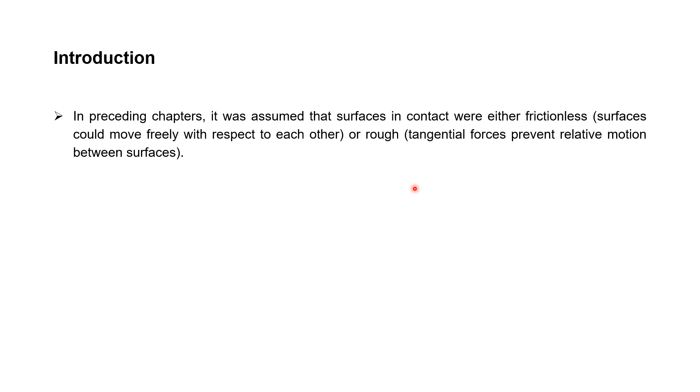So what is friction? Friction is our resisting force, the force that resists our motion. For example, if there were no friction while we are playing billiards, once the cue ball hits the other balls, our cue ball will not stop no matter what happens. Our movement just continues. Actually, there is no perfectly frictionless surface that exists.

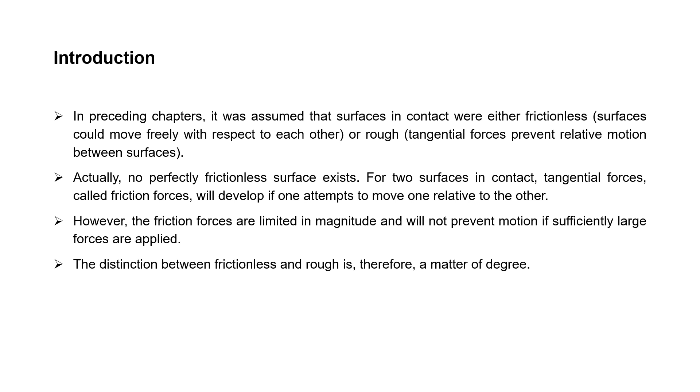For two surfaces in contact, tangential forces called friction forces will develop if one attempts to move one relative to the other. However, the friction forces are limited in magnitude and will not prevent motion if sufficiently large forces are applied. The distinction between frictionless and rough is therefore a matter of degree. There are two types of friction, dry or Coulomb friction and fluid friction. Fluid friction applies to lubricated mechanisms. Our discussion is limited to dry friction, which means non-lubricated surfaces.

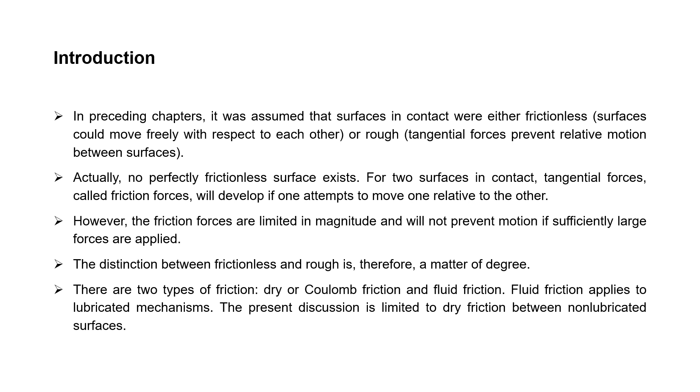Friction is defined as the contact resistance exerted by one body upon a second body when the second body moves or tends to move past the first body. Friction is the retarding force always acting opposite to the motion or tendency to move. For example, if we have a force moving towards the right, the friction force will act to the left, since it is always in the opposite direction of our applied force.

The frictional force, denoted by F sub f, is equal to mu times N. The mu varies, since it can be mu s or mu k, depending on which friction we are talking about. Mu is our coefficient of friction and N is our normal force. Always remember that the normal force is always perpendicular to the line of action.

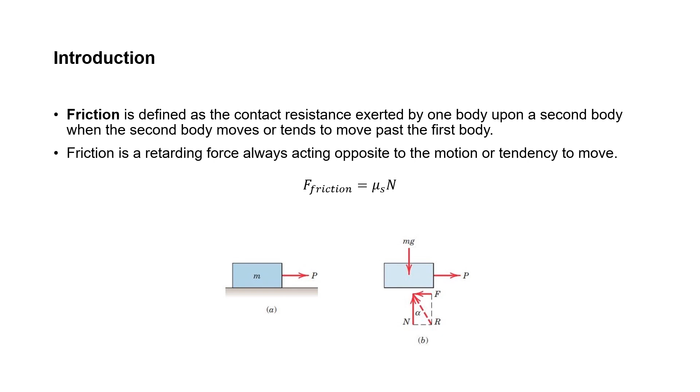Types of friction. As mentioned earlier, we have dry friction. Dry friction occurs when unlubricated surfaces of two solids are in contact under a condition of sliding or tendency to slide. A friction force tangent to the surface of contact occurs both during the interval leading up to impending slippage and while slippage takes place. The direction of this friction force always opposes the motion or impending motion. This type of friction is also called Coulomb friction.

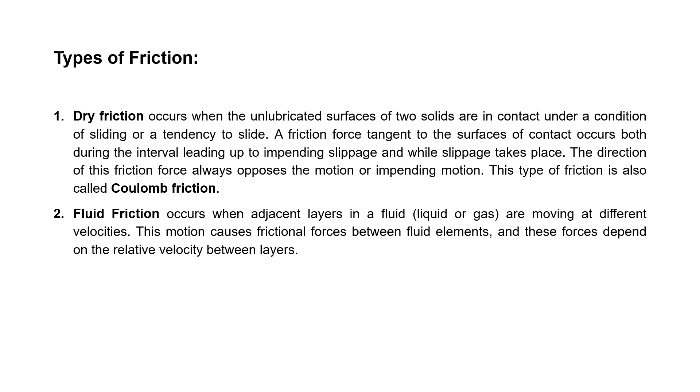Next we have what is called fluid friction. Fluid friction occurs when the adjacent layers of liquid or gas are moving at different velocities. Lastly is internal friction. It occurs in all solid materials which are subjected to cyclical loading. For highly elastic material, the recovery from the deformation occurs with very little loss of energy due to internal friction.

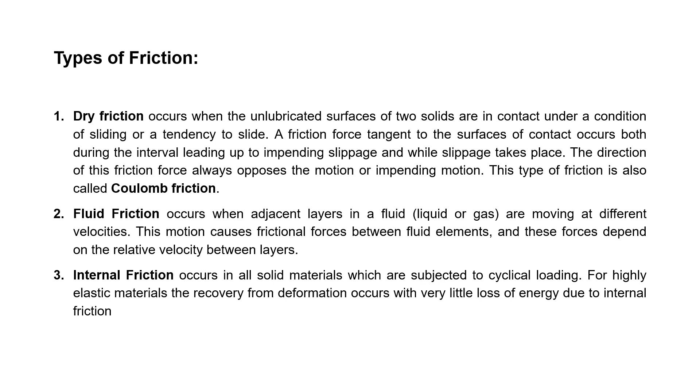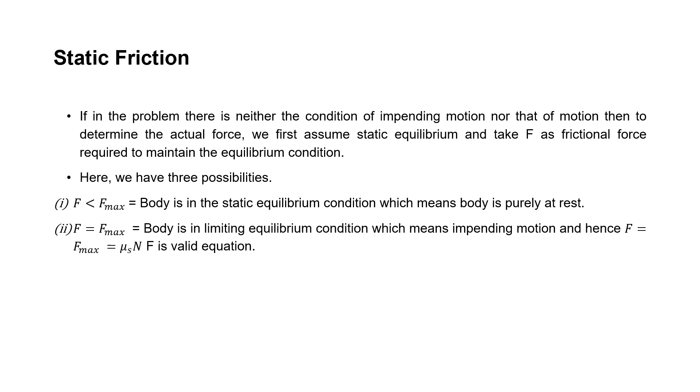For static friction, we have three cases to consider. First, the frictional force is less than the maximum force allowed. This means the body is in static equilibrium, which means the body is purely at rest. Then if the frictional force is equal to the maximum force, the body is in a limiting equilibrium condition, which means impending motion, or the motion is just about to start. The formula for the maximum force is valid: mu, the coefficient of static friction, times the normal force. Then if the force is greater than the maximum force, the body is in motion.

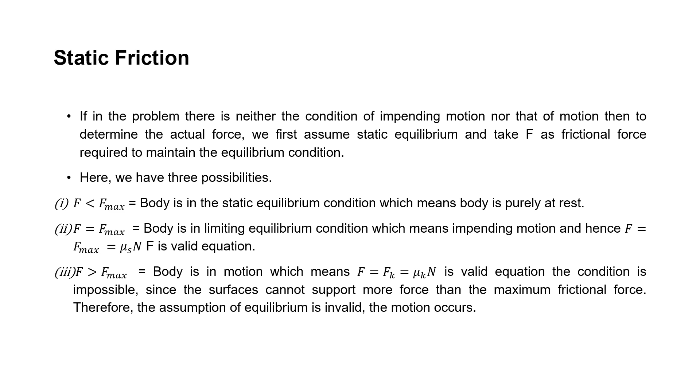Which means F is equal to the dynamic coefficient of friction multiplied by the normal force. For limiting friction, the condition of impending motion is known to exist. Impending motion means the motion or movement is just starting. Here, a body in equilibrium is on the verge of slipping, which means the body is in a limiting equilibrium condition. It is the maximum value of friction force that the surface can exert on the block and is designated by F max.

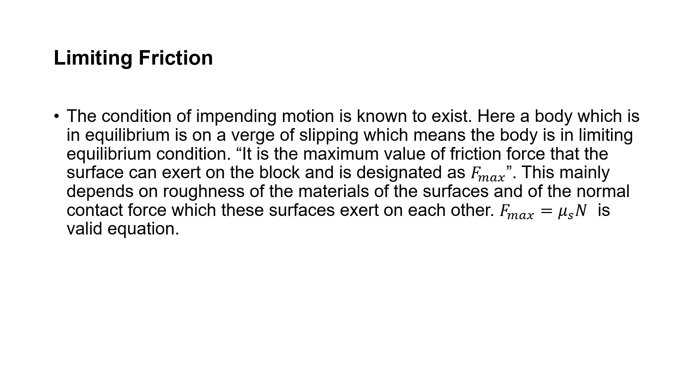The formula for F max is the product of the normal force and the coefficient of static friction. For kinetic friction, the condition of a relative motion is known to exist between the contacting surfaces.

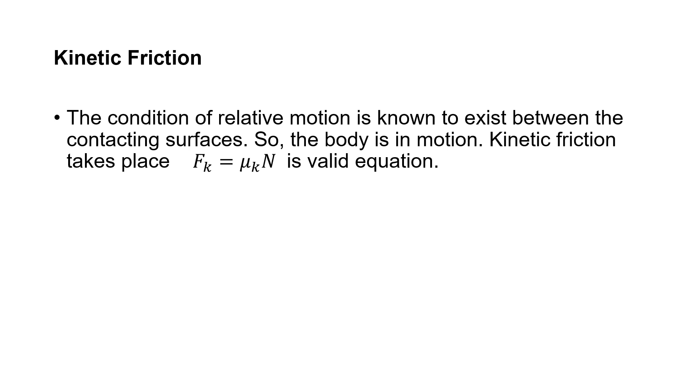So the body is in motion. So when kinetic friction is taking place, the kinetic frictional force is equal to the dynamic coefficient, or the kinetic coefficient of friction, multiplied by N. It is a valid equation.

Laws of dry friction. Again, the discussion for this topic is limited to dry friction. So the dry friction laws are exemplified by the experiment below. As shown in the picture, a weight block W is positioned on the horizontal plane surface. The forces acting on the block are its weight W and the surface reaction.

Since we have no other horizontal component present here, there is no motion, because the tendency of the normal force is always to resist the weight that we apply.

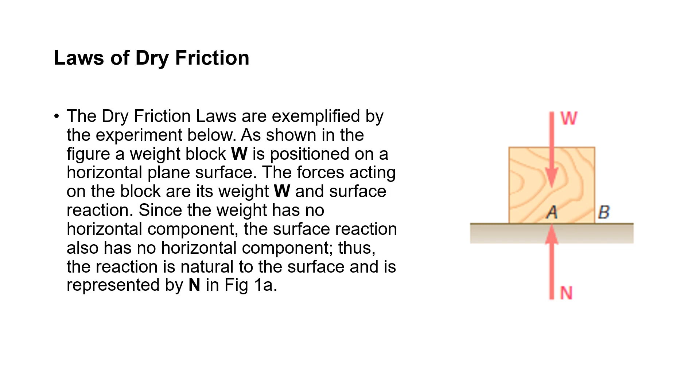Next, we are given a block with a load or weight of W. The normal force is present here. Then we have a force pushing the block towards the right. As mentioned earlier, the frictional force is there to resist our motion. If our force P tends to move the block to the right, therefore the frictional force direction is going to the left.

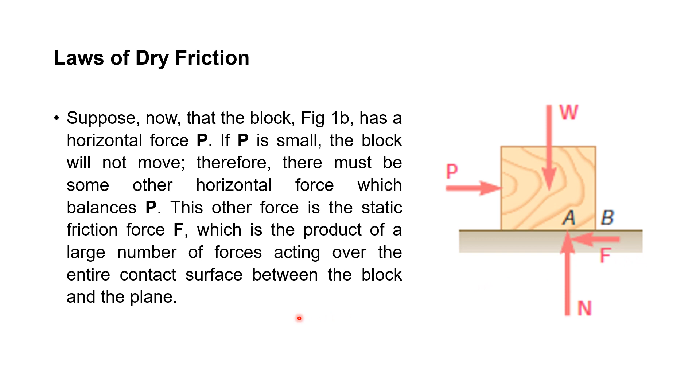Then it says here that experimental evidence shows that the static friction force maximum value F sub S is proportional to the normal force N of the surface reaction, where mu s is the coefficient of static friction. For the magnitude of the kinetic frictional force, the formula uses the coefficient of kinetic friction. Mu sub s and mu sub k friction coefficients are not dependent on the area of the contact surface. If the coefficient of static friction is not given in the problem, we can solve it using the data that we have.

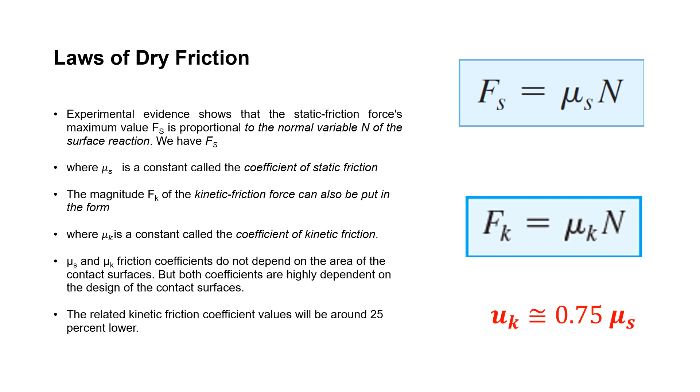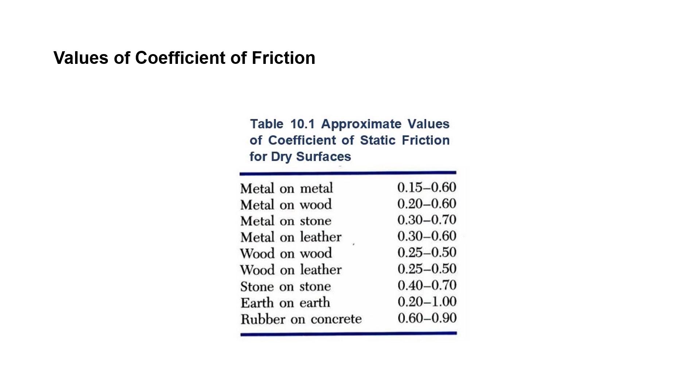The coefficient for kinetic friction is commonly known to be approximately equal to 0.75 of the coefficient of static friction. Now, what is flashed on your screen is the coefficient of static friction for dry surfaces. Here the common static friction range is present. Again, if the coefficient of friction is not given in the problem, we can get it by solving or analyzing the parameters given in the problem.

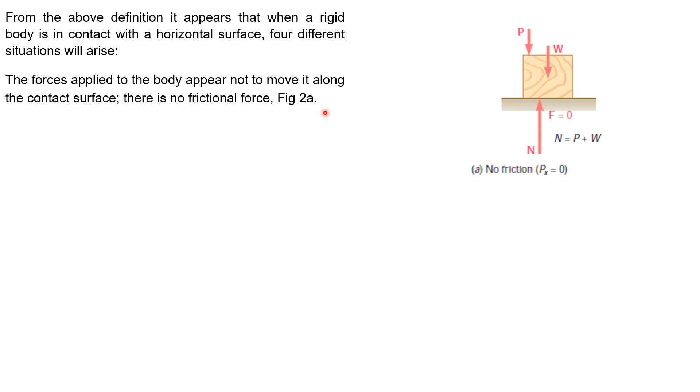From there, based on our definition of friction earlier, we have four different situations. First, the force applied to the body appears not to move it along the contact surface. In this first example, we are given a block with weight W. The force P is placed in the same direction as the normal force, so there is no frictional force present here. The normal force can be solved as the sum of our applied force and the weight. Next, our force is applied at an angle.

It says here, the forces applied tend to move the body along the contact surface but are not strong enough to set it in motion. So the friction force F that has evolved can be found by solving the body's equations of balance, since there is no proof that the force F has reached its maximum value. Then the equation F sub m equals mu times N cannot be used to calculate the force of friction, because we do not have enough details saying that there is motion here.

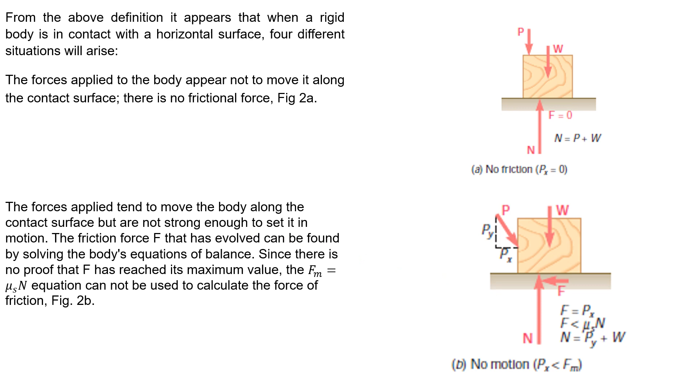Then to solve for the frictional force, we can use the summation of the x components. We add the x components here, wherein in this problem we have P sub x, or the x component of our force P. Then the force F that we get should be lower than the maximum frictional force, because there is no motion in our figure.

Next, if we are going to have motion, it says here the forces applied are such that the body is about to slip. We say here that there is an impending motion. The friction force F has reached its full value F sub m and balances the applied forces along the normal force N. You can use both the equilibrium equations and the equation F sub m equals mu s times N.

We also take note that the force of friction has a sense of opposition to the imminent motion. So for example, po dito sinabi na magkakaroon tayo ng motion. So therefore, yung frictional force sub m natin, again, is summation lang po yan nung forces along x. Then si frictional force naman po natin again is equal siya doon sa normal force multiplied by the coefficient of static friction. And yung normal force naman po natin is equal lang siya doon sa summation ng weight natin and y component nung force P natin.

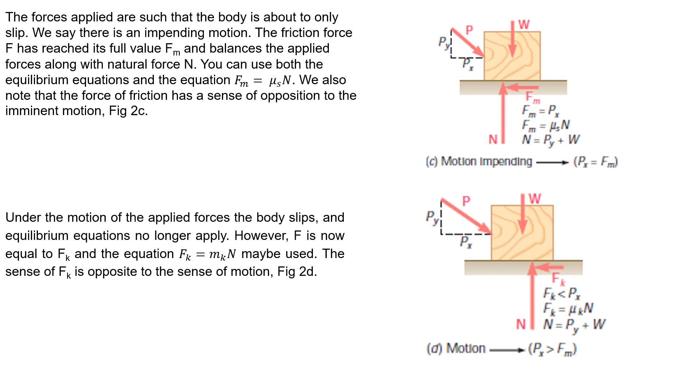Then last case po natin, under the motion of the applied forces, the body slips and equilibrium equation can no longer apply. However, F is now equal to the kinetic frictional force natin. And then, ang gagamitin na natin dito is yung equation natin for kinetic friction.

So next po, pwede natin kasing i-represent yung normal force natin and yung frictional force F natin using yung resultant force natin. So kung ganun po yung mangyayari dun sa ano natin, ito yung formula na pwede nating magamit. Kasi di ba? Again, if given ka ng vertical force and y component ng force natin, therefore, pwede natin siyang i-represent as a value of our resultant. If kung ganun po yung gagawin natin,

Para makuha yung angle po na yon, we will be simply using yung formula natin. So, tangent phi is equal to yung frictional force natin divided by the normal force. Pero yung frictional force natin can be represented as the coefficient of static friction multiplied by the normal force. So present si normal force sa numerator and denominator, so pwede silang i-cancel out. So therefore, tangent phi s is equals to the coefficient of static friction. Ganon din po yung case pagdating naman kay kinetic friction. Then we can simply solve for the angle using yung arctangent function natin.

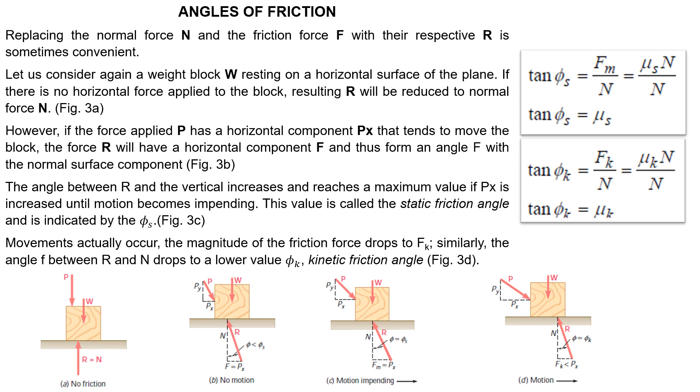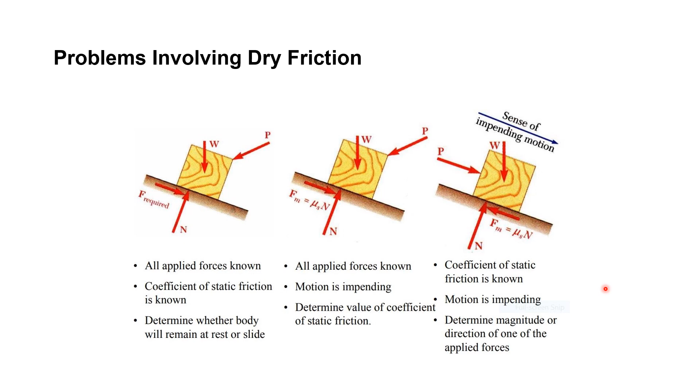So ito po yung mga possible problems na pwede natin ma-encounter pagdating kay dry friction. Una, all applied forces are known. Coefficient of static friction is known. Determine whether the body will remain at rest or slide. Yung other question naman, other case naman natin, lahat ng forces ay alam natin. And then yung motion natin is pasimula pa lang, pinapahanap yung coefficient ni dynamic friction or ni static friction. O kaya naman, coefficient of static friction is known. Pasimula yung motion natin. Pinapahanap yung magnitude or direction ng applied forces natin.

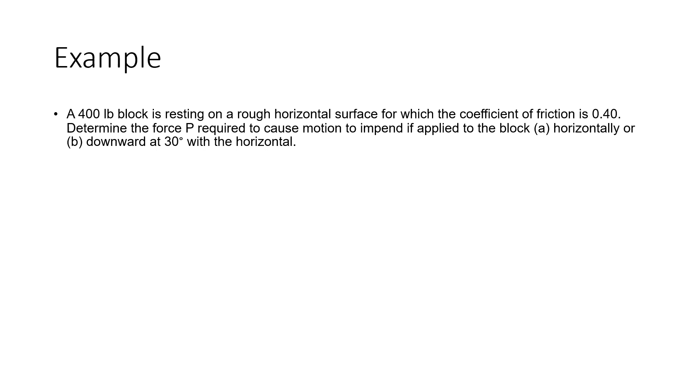Okay. So dito po, meron tayo example para ma-apply yung concept discussed earlier. So a 400-pound block is resting on a rough horizontal surface for which the coefficient of friction is 0.4. Determine the force P required to cause motion to impend if applied to the block A horizontally or B downward at 30 degrees with the horizontal. So, ito po yung given block natin. Then, ang pinapahanap po is yung value ng force P natin if horizontal ko siya i-apply. And P is equal to kung ano yung value ng P natin kapag downwards at 30 degrees with the horizontal.

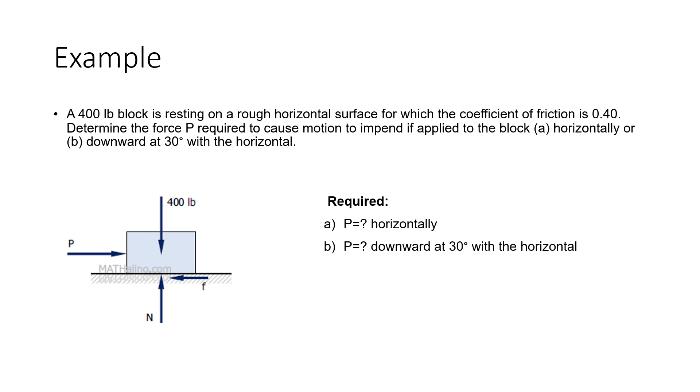First po, kailangan nating hanapin muna yung value ng normal force natin. Bakit? Kasi di ba, again, applicable pa naman dito si equation of equilibrium natin. Kaya lang alam natin na si frictional force F is equal to the coefficient of friction natin multiplied by the normal force. So mag-summation of forces vertical muna tayo. So summation of forces vertical is equal to 0. Normal force minus weight is equal to 0. Therefore, normal force is equal to 400 pounds.

Then next, the frictional force is equals to the coefficient of friction multiplied by the normal force. For this case is 0.4 times 400 pounds is equal to 160 pounds. So, summation of forces horizontal tayo equals to 0. So, ang present lang na parameter sa atin is force P and yung force F natin sa x-axis. So, therefore, we have P minus F is equals to 0. Therefore, yung P natin and frictional force natin is equal to 160 pounds.

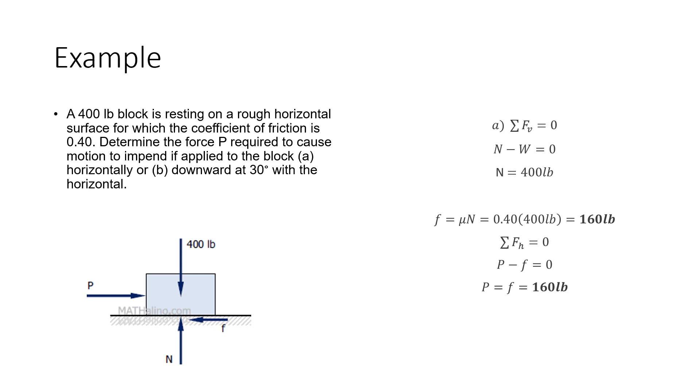So, next naman po, ang kaibahan, apply natin ngayon, or solve natin yung second case natin na mayroon po tayong in-apply na force P with an angle of 30 degrees with the horizontal. So, ngayon po, same method of solution yung gagawin natin. Ang kaibahan lang is madadagdagan lang yung ating mga horizontal and vertical components. So, first, una po natin gawin is summation of forces vertical. So, normal force is equals to 400 pounds plus P sine 30.

So, bakit P sine 30? Kasi yun yung vertical component nung force P natin. So, normal force is equals to 400 pounds plus P sine 30. Ngayon po, si force P, hindi natin siya alam yung value niya. Then, simplify lang po natin.

N is equal to 400 pounds plus 0.5 P. Ito yung tatawagin natin na equation 1, kasi kahit anong gawin natin, hindi na natin yan masisimplify pa. Next, isolve naman natin yung frictional force natin.

Alam natin na ang formula natin for frictional force is equal to mu, or the coefficient of friction, multiplied by the normal force. So we have 0.4 times 400 pounds plus 0.5 P. So yung frictional force po natin is equal to 160 pounds plus 0.2 P. Ito naman yung ating equation 2.

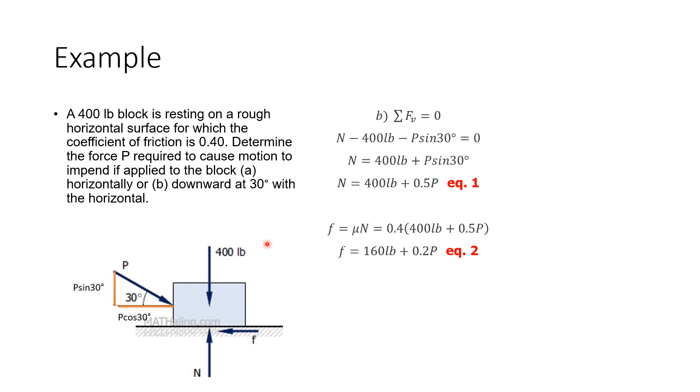Next is summation of forces, horizontal naman tayo. So again, ang horizontal component lang na meron tayo dito is yung frictional force F, and then yung x component naman ni force P. So since going to left si frictional force F, negative siya. Then plus the x component, since ito ay going right, kaya siya naging positive. So negative F plus P cosine 30 is equal to 0. Then, solving for F,

pwede na nating ma-solve si F. So, force F is equal to square root of 3 over 2 P. Saan nanggaling si square root of 3 over 2? Yan po is yung cosine 30, kapag in-input ninyo sa calculators ninyo.

Then, equate lang natin. Nakuha natin yung force F dito using the summation of forces horizontal. Then, meron din tayong force F dito sa equation 2. So, kung pareho silang force F, pwede natin silang equate sa isa't isa. So, square root of 3 over 2 P is equal to 160 pounds plus 0.2 P. Pagsamahin natin sa isang side yung equation natin.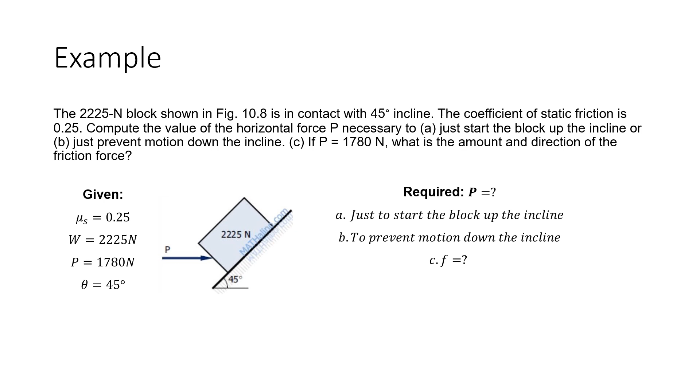So dito po mapapansin nyo, naka-incline na yung figure natin. So therefore, magro-rotate po tayo ng axis natin dito. As compared kanina, kung yung force lang na in-apply natin yung naka-incline, walang problema. Ngayon dito, yung contact surface natin yung merong inclination, kaya kailangan natin mag-rotate ng axis. Given tayo ng block na in contact sa ating surface with 45 degrees of inclination. So, ang magiging approach natin is to rotate yung axis natin.

So, syempre, kailangan nating i-drawing yung free body diagram natin. So, ganito yung magiging technique natin. Mag-drawing muna tayo ng ating Cartesian coordinate system. So, we have the x and y axis natin dito. Ngayon, we have force P na going to the right. So, pwede ko na lang siyang ilagay dito.

Then, yung weight po natin, tatandaan natin, ang weight ng block natin is 2,225 Newton. So, ito po yung weight natin. Then, ito yung ating force P. Ngayon, ang normal force po natin, kailangan natin tandaan is palaging perpendicular doon sa ating plane of contact natin. So, nasan ba yung contact plane natin dyan?

Makikita nyo dito na meron tayong 45 degrees. So, therefore, extend lang natin siya dito. Wait lang, burahin natin. So, again, yung contact plane natin, 45 degrees yung angle niya. Ngayon, yung normal force po natin is perpendicular doon sa ating plane of contact. So, pag sinabi nating perpendicular, yun po ay 90 degrees. So, ngayon, given tayo dito ng angle na 45 degrees.

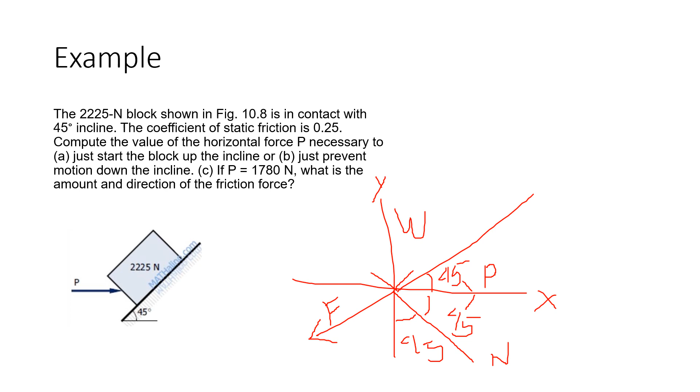Nandito ngayon yung force P natin. Then si W naman, magro-rotate tayo dito. Ang mangyayari, magkakaroon siya ng angle na 45 degrees with respect dito sa ating y-axis. Kaya po naging ganito yung ating final na free body diagram for this figure. Ayun po. Ngayon, ang naging axis na natin dito, makikita nyo, ito na yung x-axis natin. Then, ito yung y-axis. So, yung unang pinapahanap sa atin, just to start, yung block natin na umangat. So, kapag gusto natin siyang umangat, yun yung consideration natin kanina. So, dapat ang direction nung block natin is tinutulak pataas. Therefore, frictional force is going down.

Ngayon, ang gawin na natin is solve muna tayo. Pwede na tayo mag-solve dun sa mga unknown force. So, summation of forces along y is equal to 0. Normal force minus 2,225 cosine 45. So, ito po is yung y component nung weight natin. So, again, bakit natin kailangan yung cosine? Paano siya naging y component? Kasi 'di ba ito yung given na side natin, ito yung magiging hypotenuse natin.

So anong tawag po natin sa side natin dito? Ang kailangan natin is yung adjacent side. So kung given ka ng adjacent side and hypotenuse, therefore cosine function po siya. Then next is yung y component naman nung force P natin. So ang nangyari po since going down siya, kaya rin siya negative dito. So pwede na nating ma-solve to simplify, so cosine 45 is square root of 2 over 2. Makikita lang dito is sinubstitute na natin siya into decimal, pero pwede nyo rin naman siyang iwan as square root of 2 over 2.

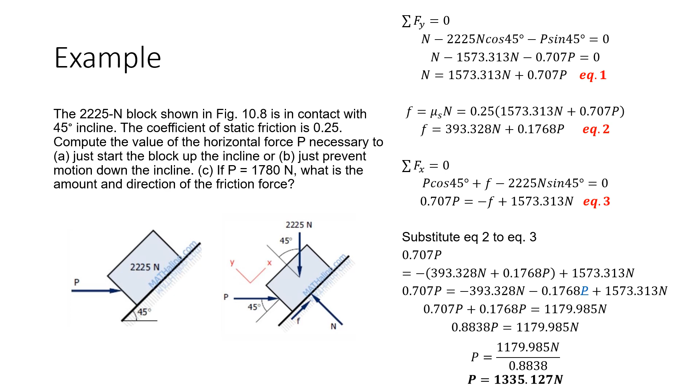P is equal to 1335.127 Newton. So, nakuha na po natin yung pangalawang hinahanap. Move naman tayo doon sa pangatlo pong pinapahanap sa atin sa sample problem.

So, sabi dito, if force P is equal to 1,780 Newton, pinapahanap sa atin yung amount and direction ng friction force natin. So, kapag yung x component natin ni P is magiging equal doon sa x component ng weight natin, ibig sabihin wala tayong friction doon sa block natin kasi wala tayong motion kapag ganon. Pero kapag yung x component naman ni P is mas malaki doon sa x component ng weight natin, yung direction ng friction natin ang mangyayari naman is pababa siya.

Bakit? Bakit siya magiging pababa? Kasi tutulungan ng friction force natin yung x component ng weight natin na mabalance yung force ng x component ng force P natin. Pero kapag yung force P naman natin is less than or mas maliit doon sa ating weight, yung friction natin is magiging direction naman niya is upward. Para naman tulungan yung x component ng force P natin na mabalance yung weight natin.

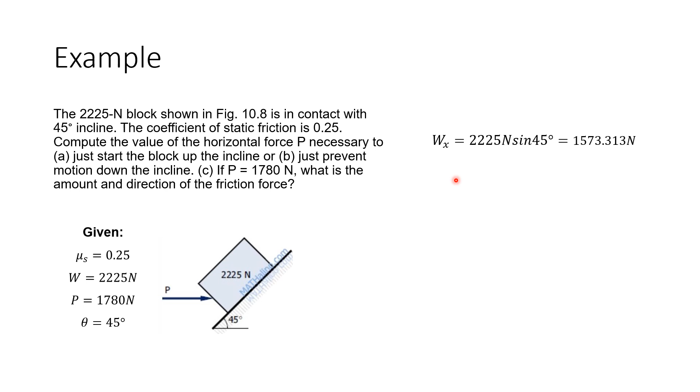Dito sa problem natin, hindi magagamit yung maximum value ng friction natin doon sa system. Kasi 'di ba, for example, kunin natin yung value ni x component ng weight natin. Again, same free body diagram po yung gagamitin natin dyan. So, x component is 1573.313 newtons and the x component ng force P natin, kapag 1780 yung P natin, is 1258.65 newton. So, ano bang scenario yung mag-a-apply dito?

Di ba mas malaki yung value ng ating x component ng weight natin as compared doon sa x component ng force P natin. So ang mangyayari lang po dito, tutulungan lang nung friction yung force P natin, kaya yung direction ngayon is magiging upward siya. Bakit siya magiging upward? Tutulungan niya lang yung x component nung force P natin na i-balance yung x component ng weight natin. So, if yung weight natin is mas malaki kay Px, thus yung direction ng frictional force natin is upward. And yun na po yung gagamitin natin dito na parameter, or sense of direction to solving.

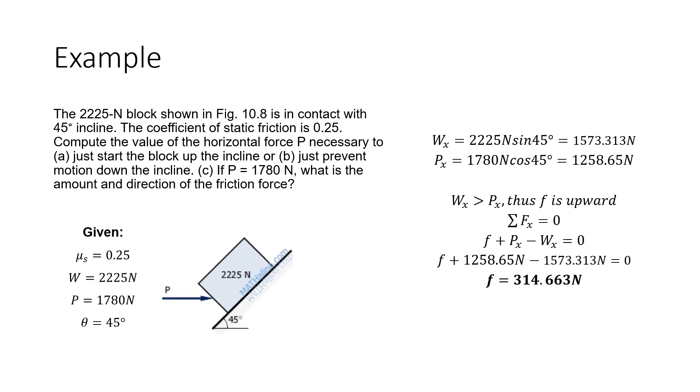So summation of force along x equals to 0. So F plus Px minus Wx is equals to 0. F plus 1258.65 Newton minus 1573.313 Newton is equals to 0. Therefore, force F natin is equal to 314.663 newtons.

Next example po natin, meron tayo ditong system of blocks na interconnected with pulleys. So sabi dito, what weight W is necessary to start the system of the blocks shown in the figure moving towards right? The coefficient of friction is 0.10 and the pulleys are assumed to be frictionless. So based po doon sa problem natin, sinabi na frictionless yung pulley natin. Kung ano yung force na nararamdaman ng isang portion natin, is yun yung force na nararamdaman ng kabilang segment natin.

So therefore, pwede natin i-disregard itong portion na to nung pulley natin. Itong dalawang blocks na lang yung i-consider natin. Ngayon, kung gusto natin mag-move towards right yan, ang direction dapat ng force na humahatak sa kanya is going up or going right. Kaya lang, ano yung magnitude nito? So again, force or weight W nararamdaman dito. So therefore, ito ay W din.

Then next is, drawing muna natin yung free body diagram. Dito sa block na naka-flat dun sa surface natin, walang problema. Vertically lang siya. Ito yung ating weight. Then, given tayo dito ng normal force natin. Then, since ang movement na gusto natin is towards right, so magiging direction natin dito ay going to the right direction.

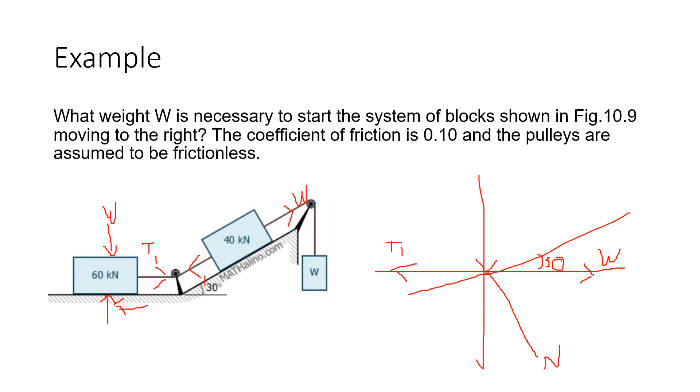Then alam natin na perpendicular dapat yung normal force natin doon sa ating contact plane. So ito yung ating normal force. So kung ito po ay 30 degrees, alam natin na perpendicular siya. So ito ay 60 degrees. Then kung perpendicular line yan, alam natin na ito naman ay 30 degrees. So again, ito po yung weight natin, no? Ito yung weight nung block natin na 40 kN.

So ngayon, ang goal natin is ma-rotate yung axis natin wherein yung normal force natin and then yung contact plane natin, siya yung magiging ating bagong X and Y axis. So before tayo mag-rotate ng axis, guys, correction. Yung tensile force 1 natin is nandito siya ngayon kasi 'di ba? Kung makikita nyo yung T1 natin is align na siya doon sa axis natin. So si tensile force 1 natin is align na po doon sa ating contact plane. I mean, ganun din po yung weight W na unknown natin. So therefore nandito yung T1 natin. Then nandito yung W natin.

So mangyayari na lang po dito is i-rotate na natin siya pag gusto natin na maging axis natin dito is yung contact plane natin. So kapag magro-rotate tayo para maging ito yung x-axis natin, magro-rotate tayo ng 30 degrees clockwise. So mangyayari po is bababa yung ano natin dito. Then yung normal force natin magiging aligned sa ating y-axis. Yung tensile force natin magiging aligned sa x-axis. Then itong weight ng block natin na W, which is yung 40 kN, is magkakaroon siya dito ng angle na 30 degrees. So magiging ganito po yung free body diagram natin na final.

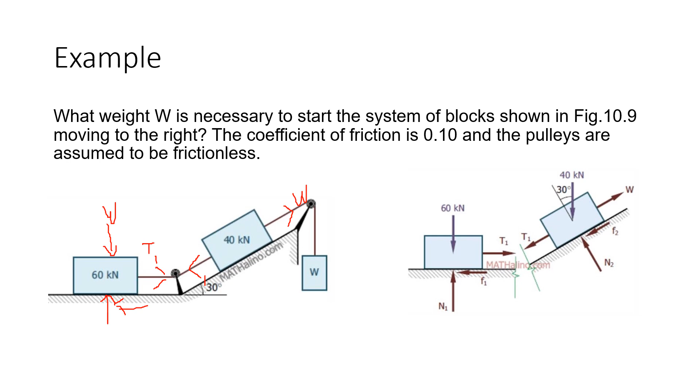Ngayon po, kapag nag-solve tayo, magsisimula tayo dito sa initial or sa unang free body diagram natin. Ito yung block na nasa along the x-axis natin. Itong block na nagwe-weigh na 60 kN. So summation of forces vertical equals to 0. N1 minus 60 equals to 0. Therefore, yung normal force 1 natin is 60 kN. Then, solve for the frictional force 1. We have F1 is equals to mu or coefficient of friction multiplied by the normal force. F1 is equals to 6 kN.

Kunin natin ngayon yung T1 natin. Kung ano yung value ng tensile force natin. So, summation of force along x equals to 0. T1 minus F1 is equals to 0. Therefore, T1 is equal to F1, which is 6 kN. Proceed tayo doon sa next free body diagram natin. We have summation of forces vertical equals to 0. Ang may vertical component na lang sa atin dito is yung second normal force, and then yung y component ng weight ng block natin. So N2 minus 40 cosine 30 equals to 0.

So bakit cosine yung ginamit natin? Nasaan ba yung y component niya? Ito yung y component kasi nung block natin. And anong side ito? So we have, ito ay yung adjacent side natin, and then given tayo na hypotenuse na 40. So given an adjacent side and a hypotenuse side, ang gagamitin natin is cosine function. Kaya po siya naging cosine 30. So N2, transpose lang natin to sa kabilang side ng equation natin. N2 is equals to 34.641 kN.

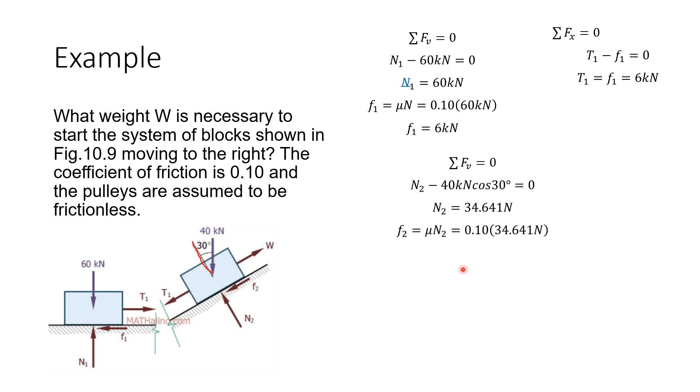Then, solve na natin yung friction force 2 natin using yung formula natin na F is equal to mu N. So, F equals mu N. So, substitute lang natin 0.10 times 34.641 kN. Frictional force 2 is equals to 3.464 kilonewton. Then, summation of forces horizontal tayo.

W, so positive siya kasi yung ano natin is going right siya. Minus yung x component naman nung applied force natin, yung weight nung block natin. So W minus 40 sine 30 minus T1. So bakit minus yung T1 natin? Kasi going left. Then minus F2 kasi going left din yung direction ng frictional force natin equals to 0. Substitute lang natin yung value ng T1 and F2. So we have W minus 20 kilonewton minus 6 kilonewton minus 3.464 kilonewton. W is equals to 29.464 kilonewton.

And dyan po nag-e-end yung discussion natin with regards sa frictional force natin.